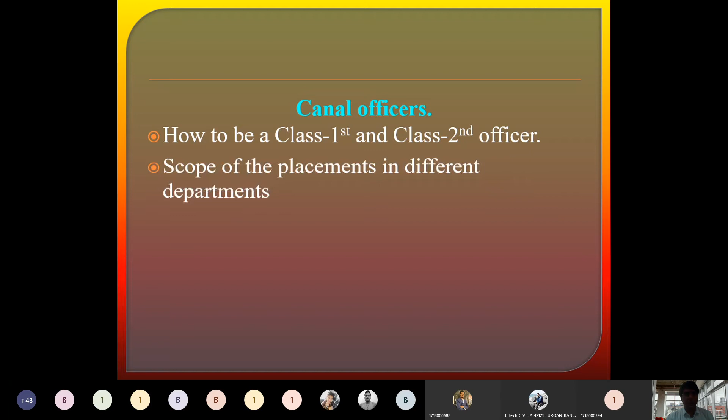So there is an opportunity as an assistant engineer, junior engineer. In today's lecture, I am talking generally about water resources. In case you want to become a first class officer or second class officer in water resources engineering or the CADA office, Command Area Development Authority, how do you become a good officer in the water resources sector? So the scope of placement in different departments.

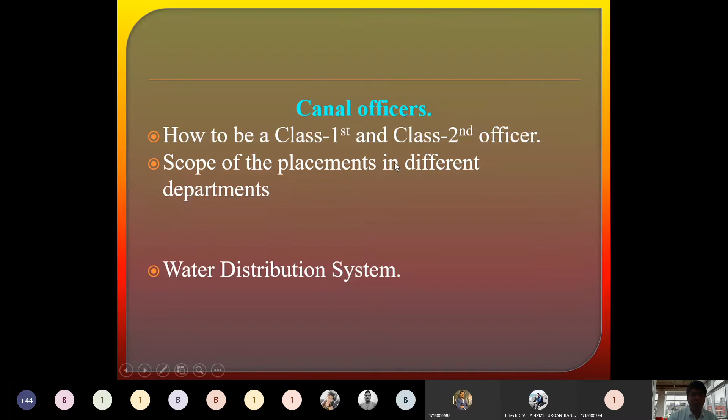We have the water distribution system, officer posts in the irrigation department. If you see here, the present status of engineers and their recruitment - first one here is the junior engineer or sectional engineer, then AE2 or SO, sectional officer. This is the first post by which you will have an opportunity to join the irrigation department.

Then there's class 1 officer, that is assistant engineer class 1 officer, then SDO, SDE, sub-divisional officer, sub-divisional engineer, then AEE, assistant executive engineer. So from JE, AE2, then AE1, then AEE - as a fresher engineer, you will get this post by clearing your MPSC examinations up to AEE, Assistant Executive Engineer. You will have a chance to be recruited as a fresher up to AEE, but other posts come by seniority.

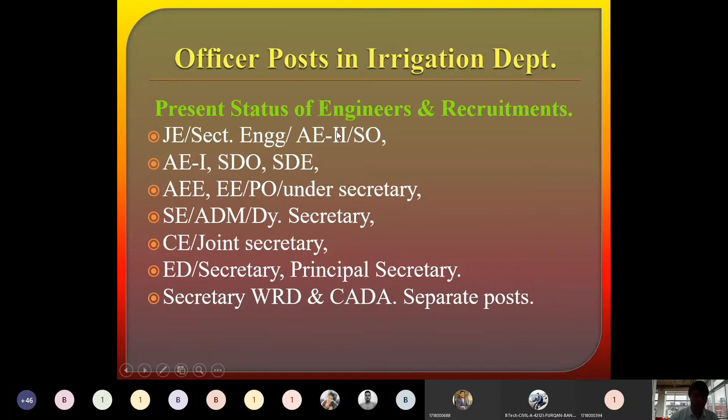Executive engineer, then PO, under secretary, then SE, ADM, then deputy secretary, then chief engineer, joint secretary - all these posts come by seniority or experience. Then principal secretary, then secretary WRD, then CADA, a separate post will be there. So these are the present status of engineer recruitment in the irrigation department.

Now let's look at the officer rank in the irrigation department. We should know the rank in the irrigation department since we are civil engineers, so you should know what is going on in the department. So chief secretary irrigation, then principal secretary CADA (command area development authority), then principal secretary WRD (water resources department), then secretary CADA, then executive director MIDC, then secretary WRD. Under the secretary CADA there will be two posts, then joint secretary CADA, then chief engineer region. Under secretary WRD there is a hierarchy - joint secretary WRD, then chief engineer regions.

Under the joint secretary CADA, there is a deputy secretary, then superintending engineer and administration of circles, then deputy secretary WRD, superintending engineer of region. Then the post comes under secretary CADA, then EE of division, then under secretary WRD, then EE of divisions, then desk officers, then AEE of division, then desk officers, then AEE of divisions, then senior clerk, then SDO, then AE, then sectional officer or junior engineer.

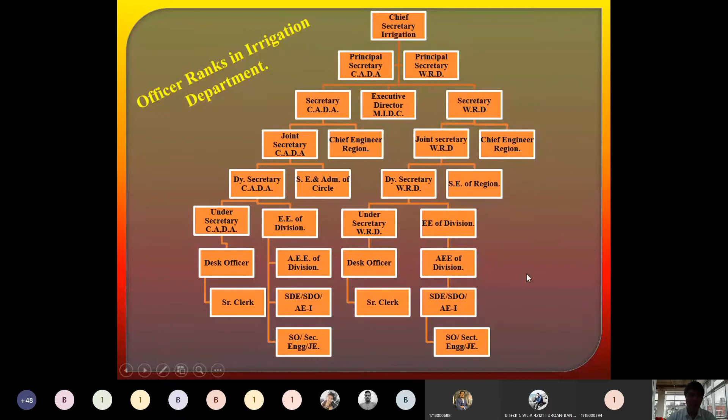Another thing I would like to say - there is technical staff, executive director, the main persons in the irrigation department. Under this there's a hierarchy: chief engineer, then chief engineer for specified projects, then chief engineer water conservation, then superintending engineers - superintending engineer for medium project, superintending engineer for major project, and for minor irrigation project.

So there are major projects, medium projects and minor projects, and accordingly there are superintending engineers. Then executive engineer constructions, executive engineer management and special executive engineers, then sub-divisional engineer water supply, sub-divisional engineer survey, and sub-divisional engineer groundwater survey is also there in the irrigation department.

Then JE, AE second class, then sectional engineer, then management - lift irrigation also there, then colony management, maintenance, sectional officers. So these are the hierarchy. The main person is executive director, and the last one is the colony maintenance sectional officers. So this hierarchy you should understand.

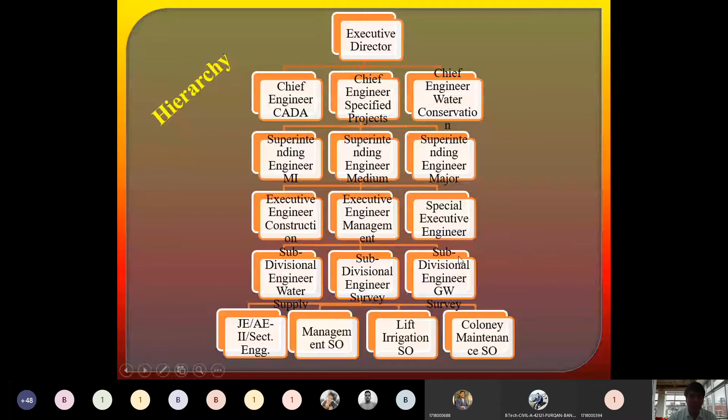Then way to become an officer - how we will become an officer in case of the irrigation department - by clearing the MPSC examinations. Then UPSC examination will be there, then IAS examinations, then National Defense Academy examination will be there. So the syllabus - you go through all the syllabus for MPSC, UPSC, IAS, NDA.

Then scope for the recruitment. If you see here, in case of the irrigation department, we only know water resources WRD department is there, but we have various other departments in case of irrigation. See here, these are the various departments, but we don't know when the recruitment process will be going on. Water resources department is the main one, then there is water conservation department, WCD.

Now I would like to talk about the water conservation department. If you've heard about Valmi, which is nearly 2 to 3 kilometers from our college on Paithan road, there is a Valmi - water and land management institute, known as Valmi, Aurangabad. So they are going to conduct one recruitment process through MPSC. They have inaugurated one important department in Valmi itself, known as water conservation department.

Some of the questions ask about the act application to irrigations. So I would like to share certain acts - these are the acts. Only the name they will ask, means they generally ask about these acts in the MPSC oral examinations - what are the various acts in case of the irrigation department?

So you should remember this act, Maharashtra Irrigation Act 1976. If you refer to the irrigation department, while filling your final MPSC examination, after clearing your main MPSC examination, they ask which department you would like to join. So if you write irrigation department or water resources, then in oral examinations there is a possibility some question will be there about what are the various important acts in case of irrigation.

So my request to all of you is to go through this act.

At this stage, I would like to highlight these important acts: Maharashtra Irrigation Act 1976, Maharashtra Water Resources Regulatory Authority Act 2005, Maharashtra Water Resources Regulatory Authority Rules 2013, Maharashtra Management of Irrigation System by Farmers Act 2005, and Maharashtra Management of Irrigation System by Farmers Rule 2006.

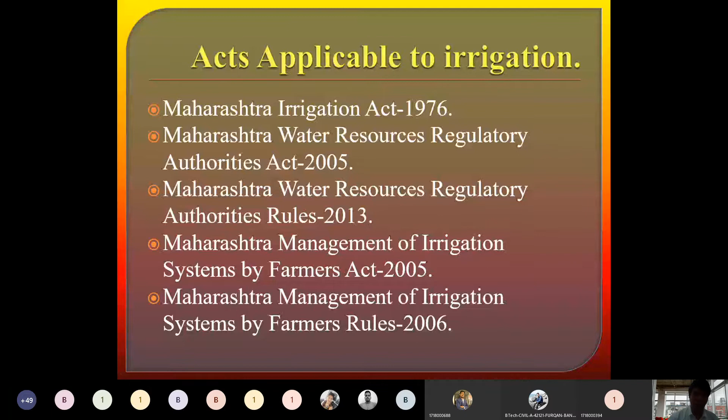So go through these things. Then, the duties and functions of the CO.

If you want to become a good officer in the irrigation department, what are the duties and functions of the CO? One is to provide necessary technical guidance for capacity building of the WUA, the Water User Association.

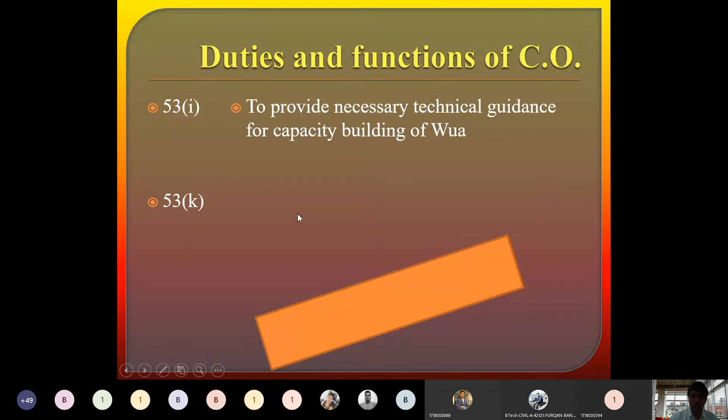What do you mean by this Water User Association? Then another important duty and function of the officer is the assessment and recovery of water charges from water user associations. So how do we provide water from the dam to the field, and how do we recover the charges?

We collect certain revenue by supplying water to the farmers, and we collect revenue from that water supply. So there will be an assessment, and recovery of water charges from water user association sectors. These are the two functions generally we should know as an officer in case of irrigation. To perform all these duties, the officer must know these things.

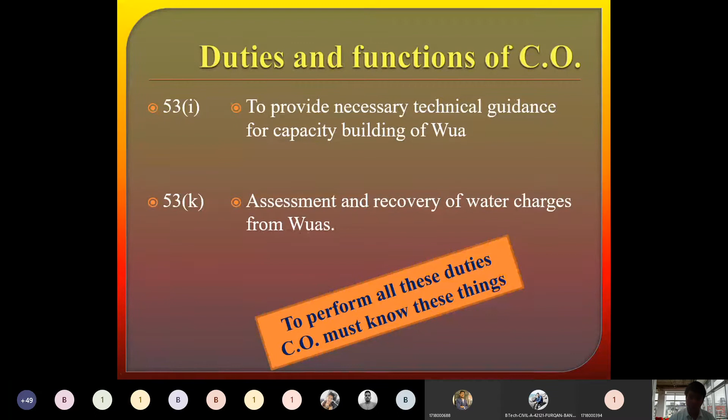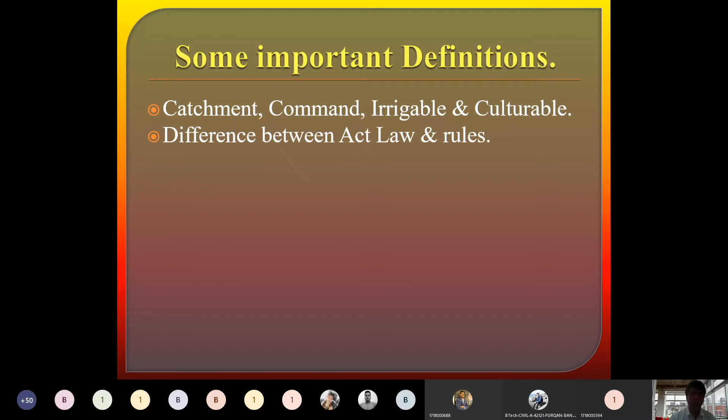Generally some important definitions you should know, because after becoming an officer in water resource engineering, you should know some important definitions. What are the various important definitions? First is catchment, then command, irrigable and culturable, then the difference between act and law and rules, then the difference between FC and WC, then definitions of canal and canal officers, then normal year, deficit year and scarcity year.

Then entitlement, then bulk, then individual and allocable, then competent authority, WRD, RBA, MWRRA, then civil court, then criminal court, then award, then judgment, decision, then decree, then verdict, then caveat and order. These are some of the things you should know.

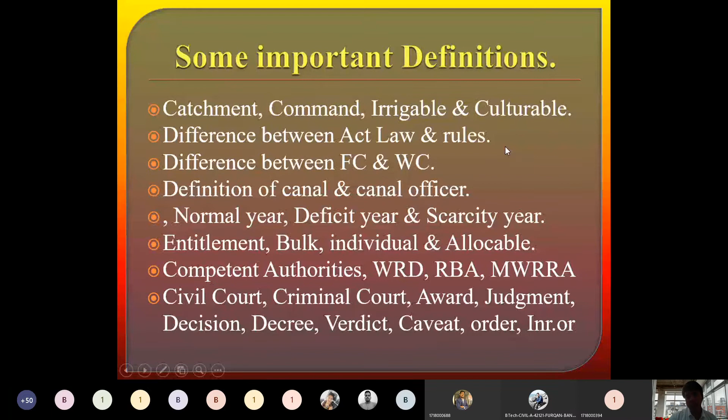At this stage it is not possible to cover all these things, but as far as the canal officer point of view, CO means canal officer after clearing the MPSC. If you get a chance to become a canal officer, you should go through all these technical details. At this stage I would like to highlight that in further lectures we will go into details, but we will see preliminary things in the introduction part, then the types of water user associations, then the system and the canal officers.

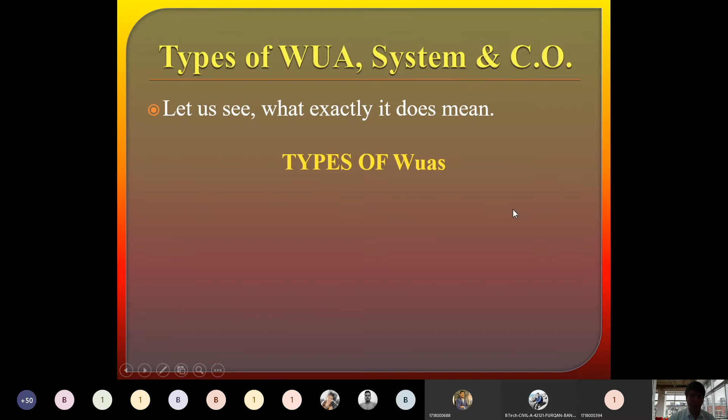Let us see what exactly this means: types of water user associations. The minor level water user association is known as MLWUA. Then there is the distributory level water user association. There are two types so far: one is minor level and another is distributory level, and the third one is canal level water user association, known as

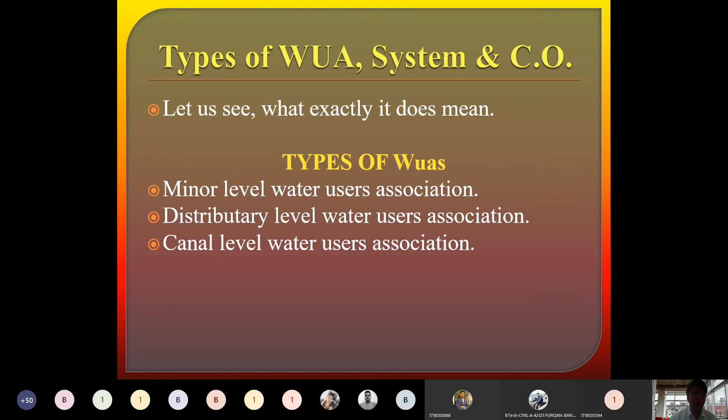CLWUA. Then we have the project level water user association, then the lift irrigation water user association. So these are the types of water user associations: minor level, then distributory level, then canal level, then project level, then lift irrigation water user associations.

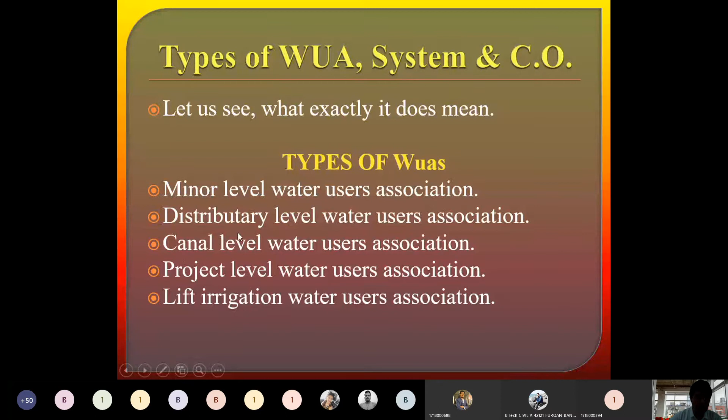So how is the water distributed? From this Paithan Right Bank Canal, as shown in the last slide, these are the types of users, how we can provide water at the minor level, then distributory level. These things are very important from your project point of view, especially when thinking about projects in water resources engineering.

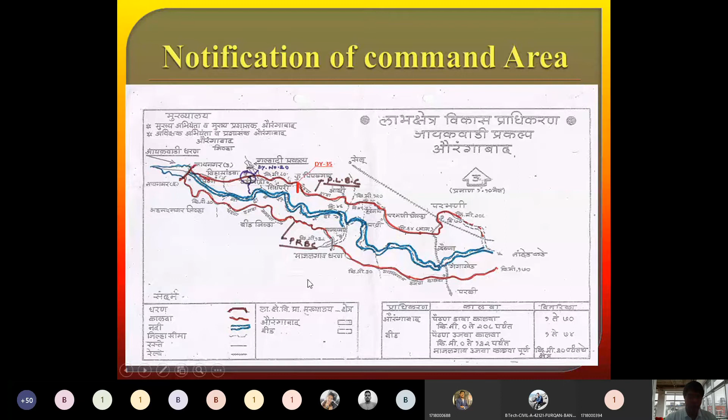So how is the water distributed? I have listed that the water is distributed by 5 methods on the downstream side with the help of the Paithan Right Bank Canal. Another point is the flow irrigation water user associations.

Now these are the areas where we have to provide water with the help of the Paithan Right Bank Canal and Paithan Left Bank Canal. So it is important to know how we can release the discharge in the Paithan Right Bank Canal, depending upon the culturable command area and how much crop we have, since we have different types of crops.

On the downstream side there is rice crop, then jowar, bajra, and different types of sugarcane also, so many types of crops will be there. Depending upon the total culturable command area, CCA, we have to supply or release the water through the Paithan Left Bank Canal or Paithan Right Bank Canal.

So there are certain rules and regulations that we maintain with the help of flow irrigation. We supply the water from flow irrigation.

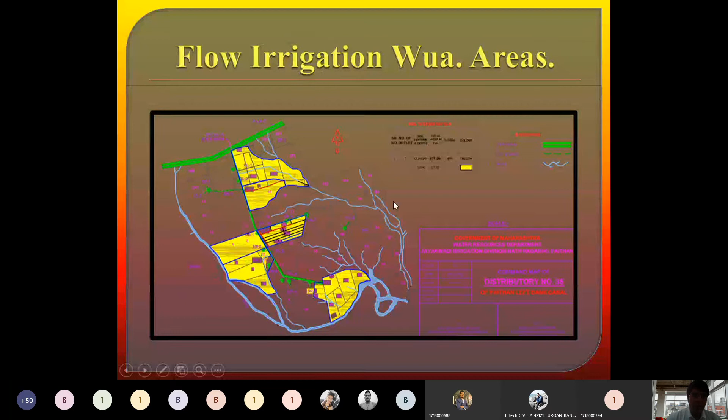In case of the minor level water user association, now if you see how the water is distributed, for example this is one of the fields, M1, M2, M3, M5. We have to mark out the various fields through the main canal and supply the water for the first field, then second. This is the area where we have to provide water through the main canal.

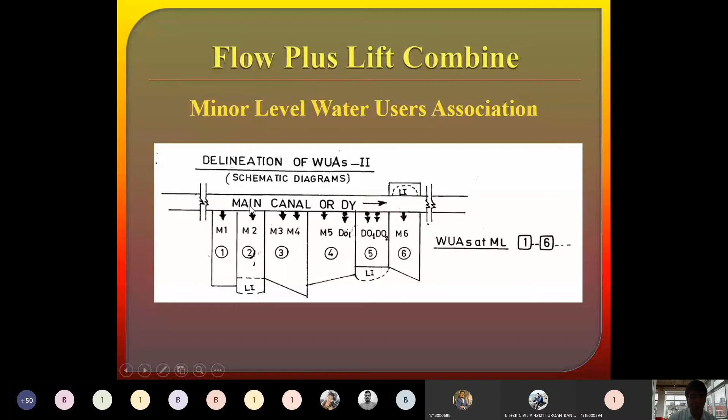So certain problems will be there. As a canal officer, your duty is to go through the maintenance required to clear these things, and if you want to supply the water for the end users, end farmers, these things will generally happen. So as a good canal officer, these things will be there in our future - some of the problems when the canal is not running properly or in proper working conditions.

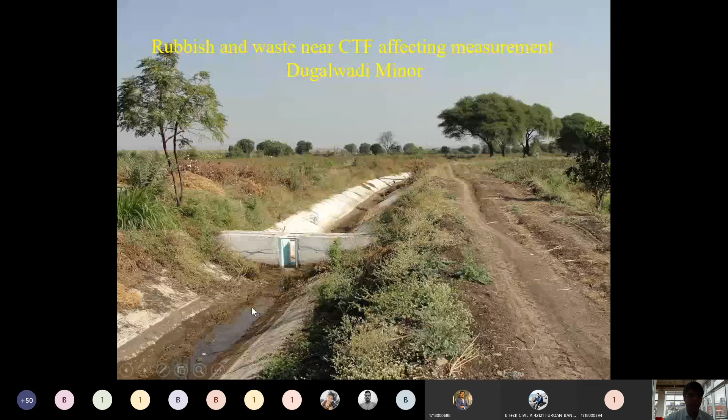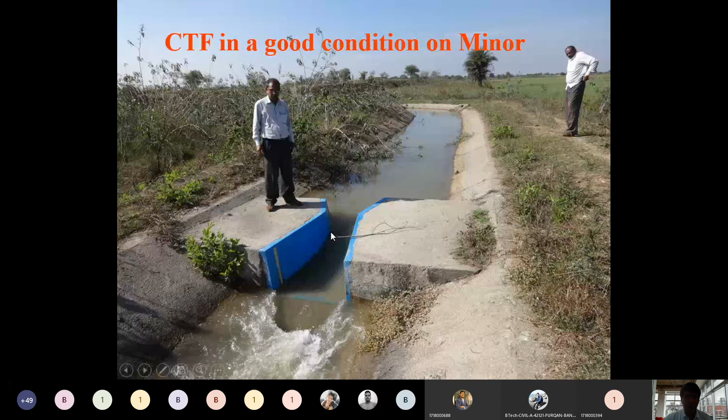These are certain things we should know for good maintenance as a canal officer. The cut throat flume is there for measuring the discharge, so such things you have to look at. Then distributary level water end users. So another thing is that this is a main canal, then major canal, then distributary canal, and then water course.

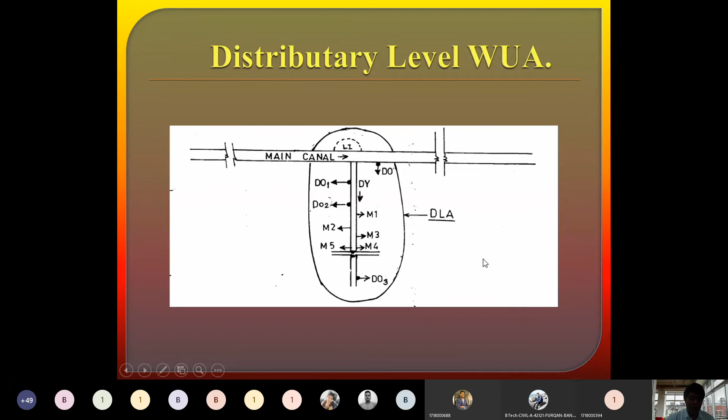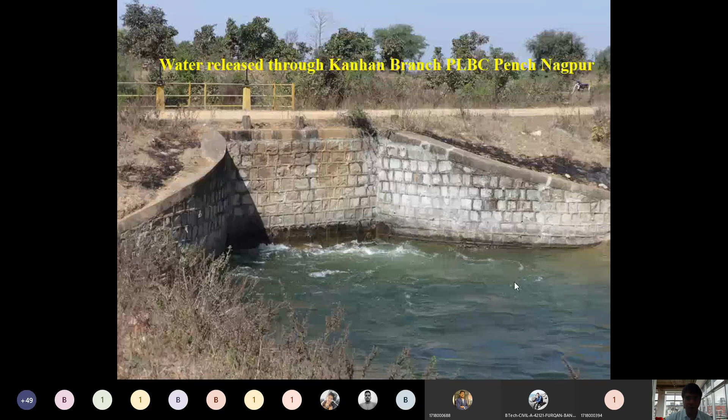Then canal level water user. Again, this is a main command area. Then we have to divide it into small plots, and depending upon the different types of crop, we have to manage the water.

For example, one farmer is having 10-acre land, so how much water will that farmer require? One farmer is having 2-acre land, then how much water will that farmer require? So according to the crop water requirement, we have to supply the water from the main canal.

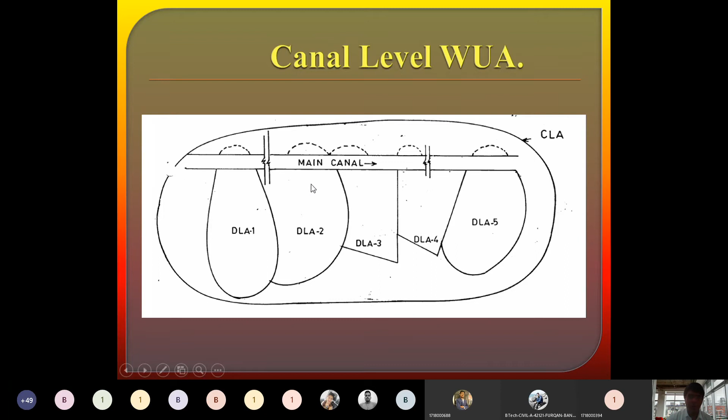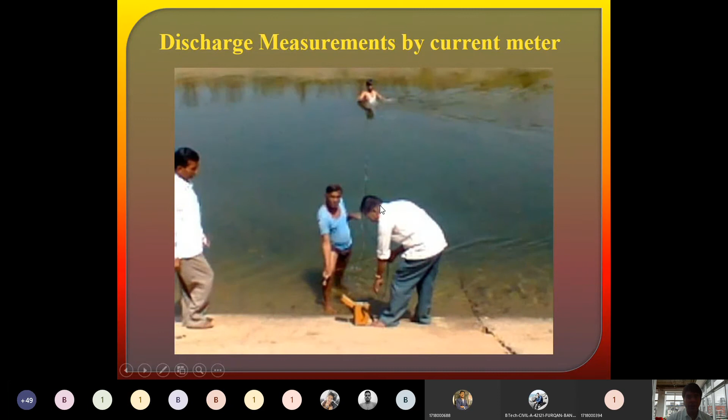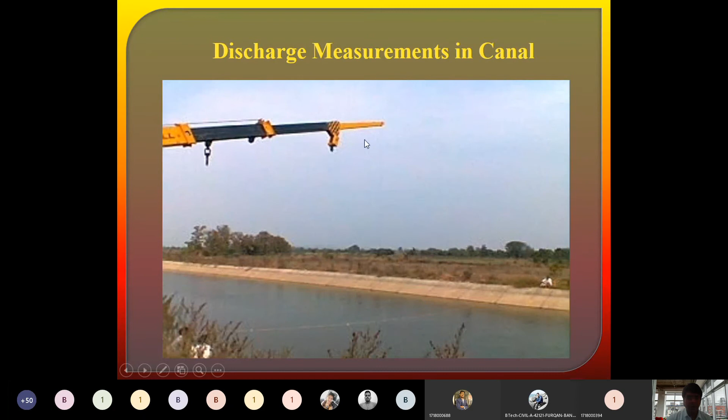So this is another important canal of Pench project, Nagpur. Then how the discharge is measured with the help of a current meter. This is the thing we have to know as canal officers. This is the measurement of discharge in the main canal with the current meter. You should be familiar with how to measure the discharge.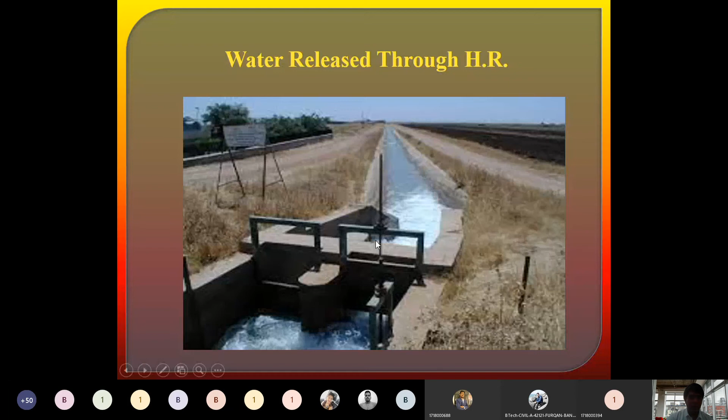Then water release through head regulator. This is a head regulator, and it is in good condition. So with this we have to release the water whenever required on the downstream side.

Then PIM, that is project information memorandum, applicable to the Jayakwadi Dam. So these are the basic things. The project information memorandum contains project information about land and about the requirement of other acts that might be required to propose building work.

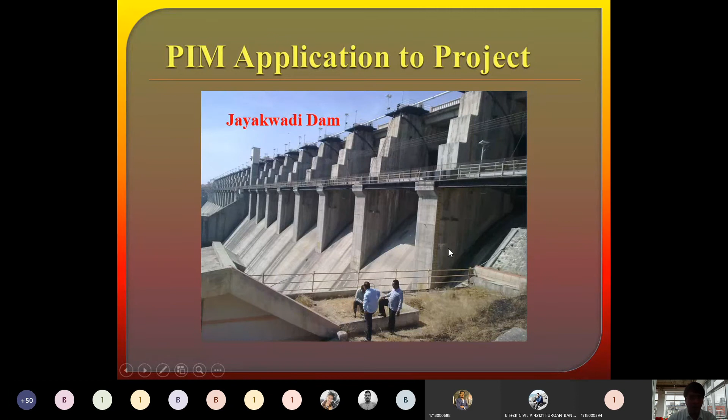Jayakwadi is a major project. Then this is another thing I would like to share with you. This is the Warana project in the case of Shirala Taluka in Sangli district, where we knowingly manage the discharge capacity for water release in safe actions.

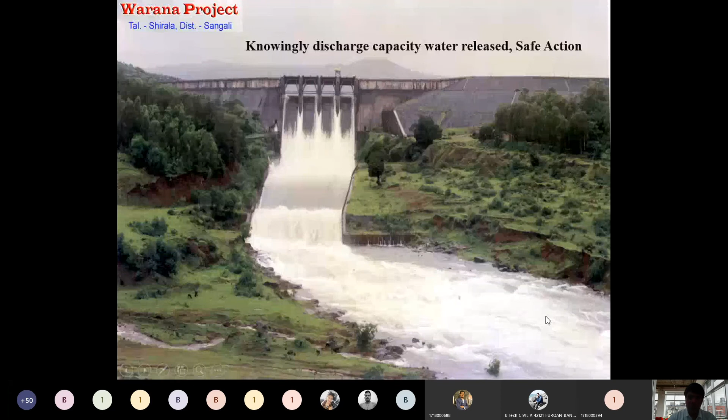As a canal officer, if you release more discharge than the capacity, for example if the canal capacity is 10 cusecs or 15 cusecs, and you release more water from the dam, then such a situation will occur that everywhere flooding will happen. So as a canal officer, you should know the exact capacity of each.

Whatever the spillway may be, in case of Jayakwadi Dam there are 27 spillways, 27 gates. So we should know the capacity of each and every gate, and if all the gates are opened at a time, what will be the situation on the downstream side? As a canal officer you should know this, otherwise such a problem will happen.

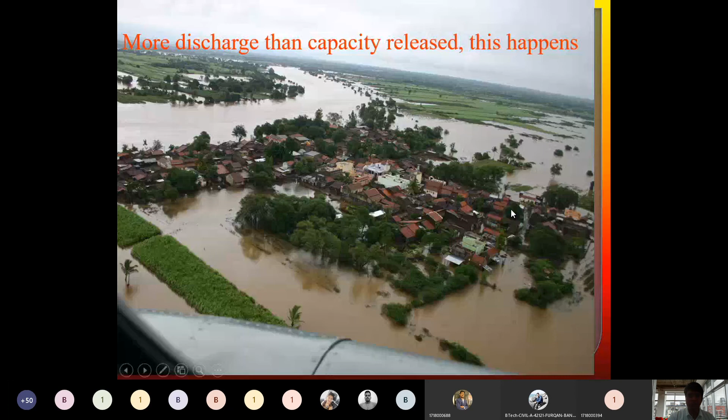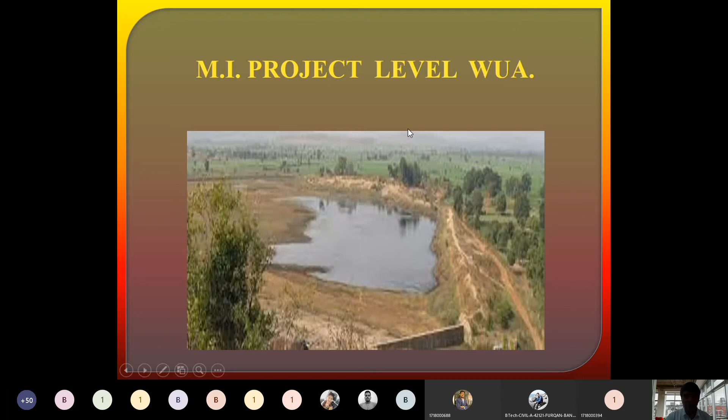Then MI project, this is a minor level project, meaning it is a Bandhara type project, or you can say Nala bunding. So such type of project is known as a minor project, where the catchment area is very small. We have to build a wall across the Nala or river, store the water, and utilize it for irrigation as well as for improving the water table.

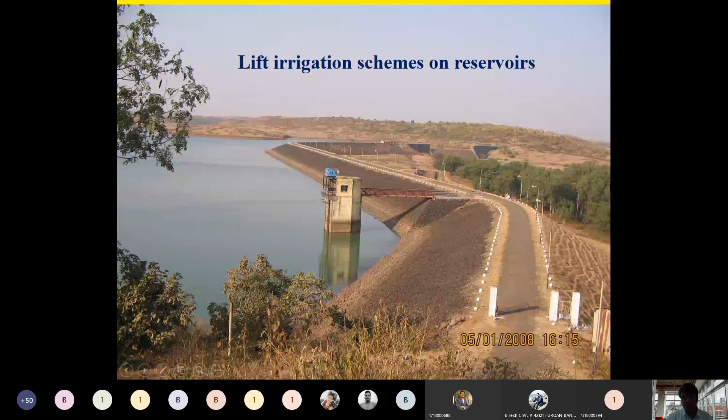Then this is lift irrigation, a minor irrigation project. We have a pump set up here, and from this we have to lift the water and supply it to the downstream area. So such a scheme is known as lift irrigation.

He will conduct meetings and make farmers aware of how to use the canal water. Then he discusses with the farmers certain issues regarding how many farmers get water from the canal, and how many are not getting proper water at the proper time. So as a canal officer you should know all these things.

So deciding the name of the water user association, this officer will decide, apart from the farmers, who will be named as group leader. That group leader gives the information to this canal officer. So there will be a hierarchy for supplying information and discussing issues related to proper management of water as per crop water requirement.

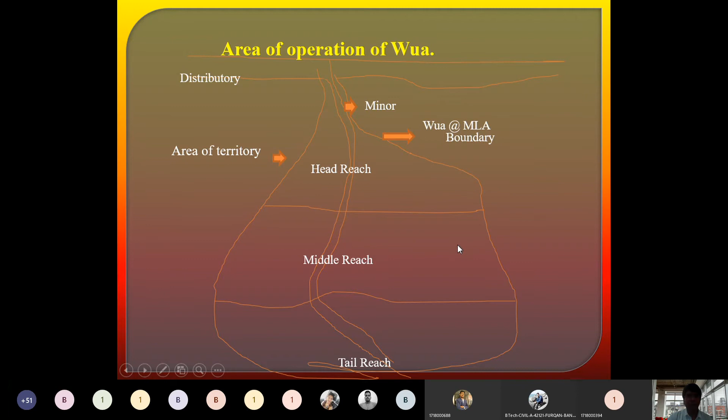This is the area of water user, this is the distributory, and this is the catchment area. This is minor, then head reach, middle reach, and tail reach. This is how the water is distributed, with landmarks shown here. Then this is the registration of the Water User Association in the Office of the Executive Engineer, and how that registration happens with the executive engineers.

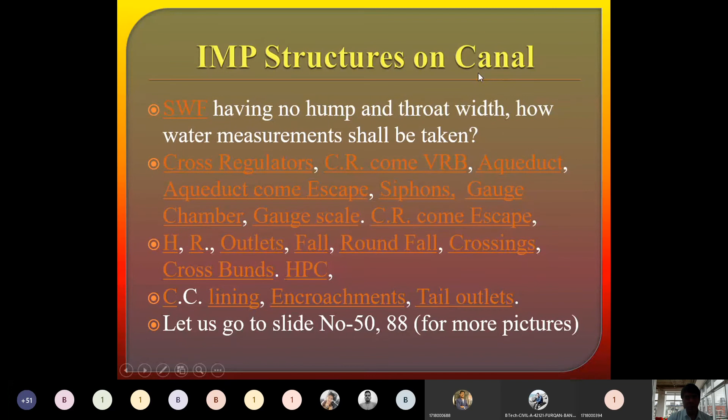These are some of the important structures on canal: cross regulator, head regulator, siphon, gauge, lining of the canal, encroachment, and tail outlet. So many things you should know as a canal officer. These are the structures we have to build on the main canal. These are the things I would like to share with all of you.

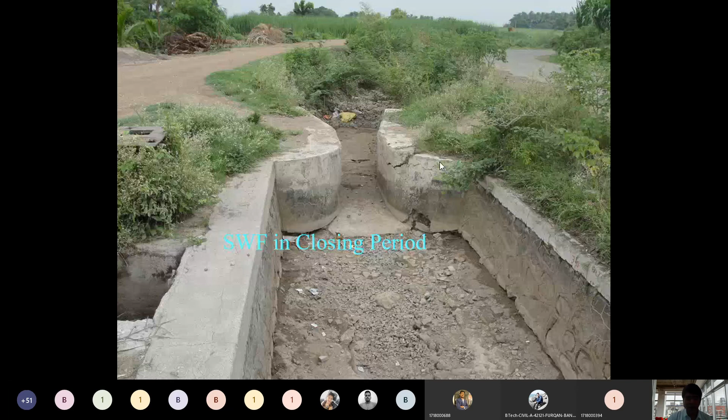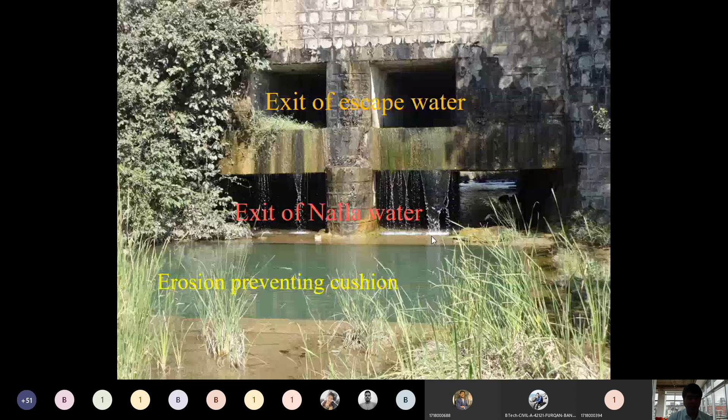See the canal conditions. It is not in good condition because erosion takes place, cracks will be there, and many issues cause the farmer to not get proper water. Here you can see the aqueduct, and these are some of the important photographs.

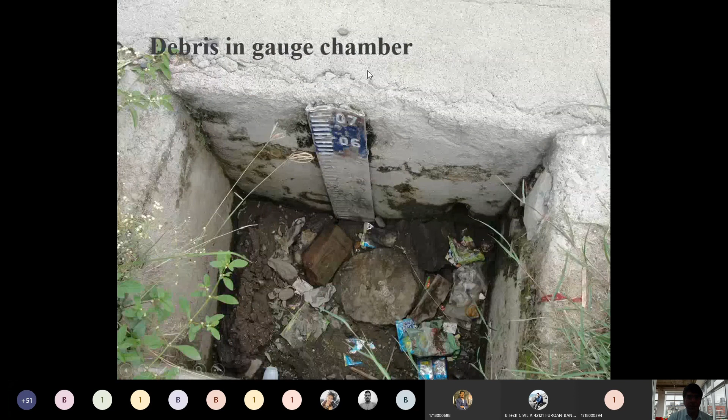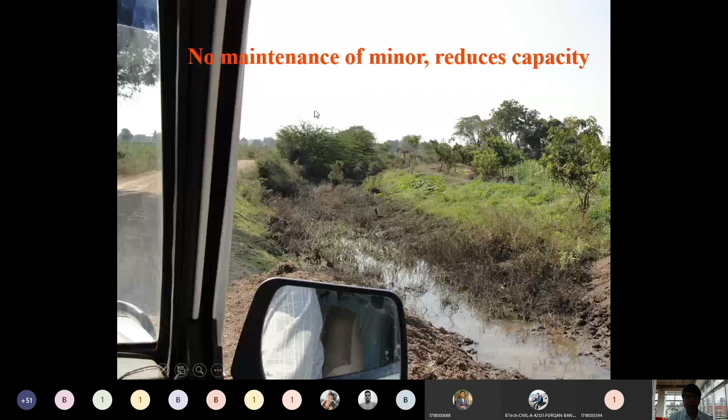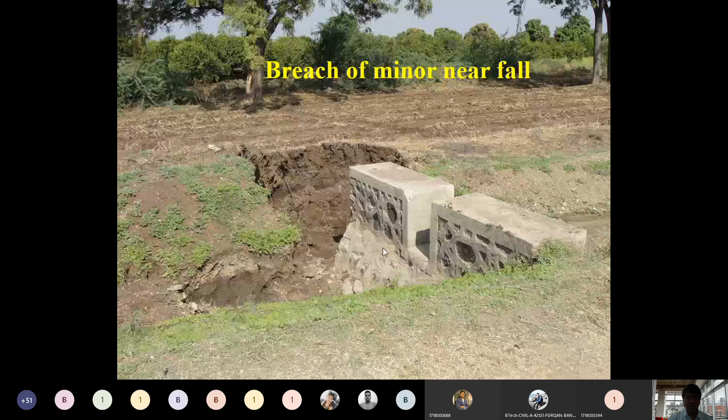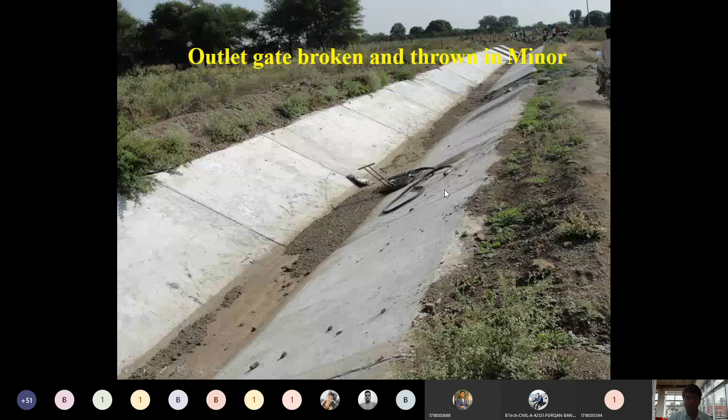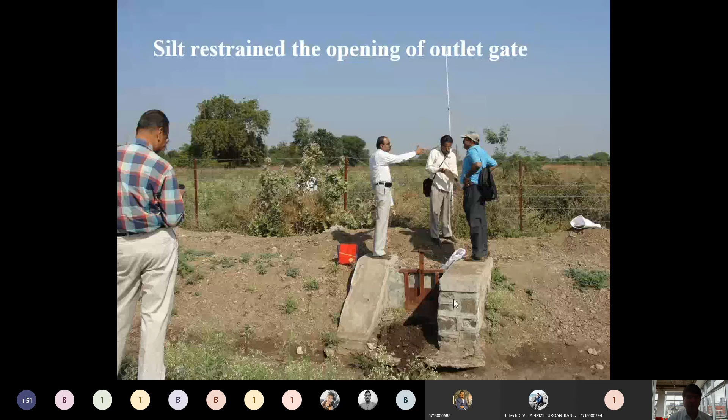Then there's a silting problem - from this you're supposed to get water, but this is completely out of working. Again see here, from this you're supposed to get water for your sugarcane, but due to the bad condition the farmer cannot get the water. So this canal officer is discussing the issue and looking into these problems.

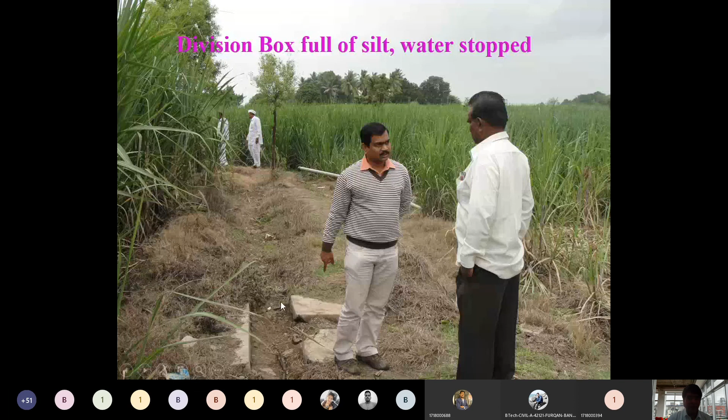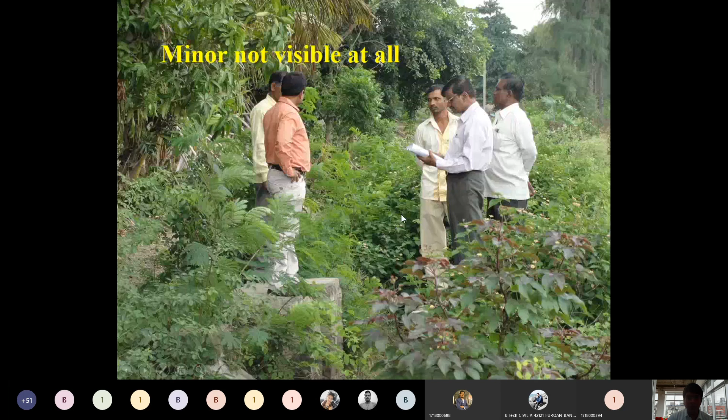See here, this is the minor canal. You have to think about how the farmer is responsible too - from this picture it is clear that the farmer is also responsible, because if the farmer can maintain this particular water course, there will not be such problems. So sir, these are the things I would like to share with you - as an officer, what are the various problems and how to tackle them.

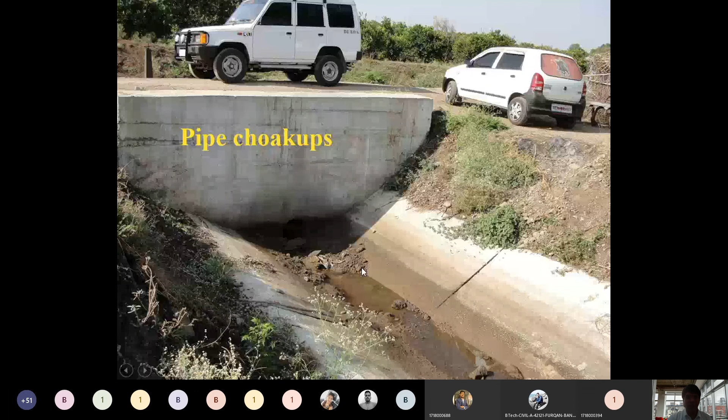These are certain problems - lining problems, then maintenance problems will be there. So these are the conditions of the canal. At this stage I have completed sharing certain things which I have experienced.

So to become a good canal officer, you have to do a lot of work. I have made clear to you today all the things in front of you. Good luck for your upcoming competitive examinations, and I hope you will be good officers in your life.